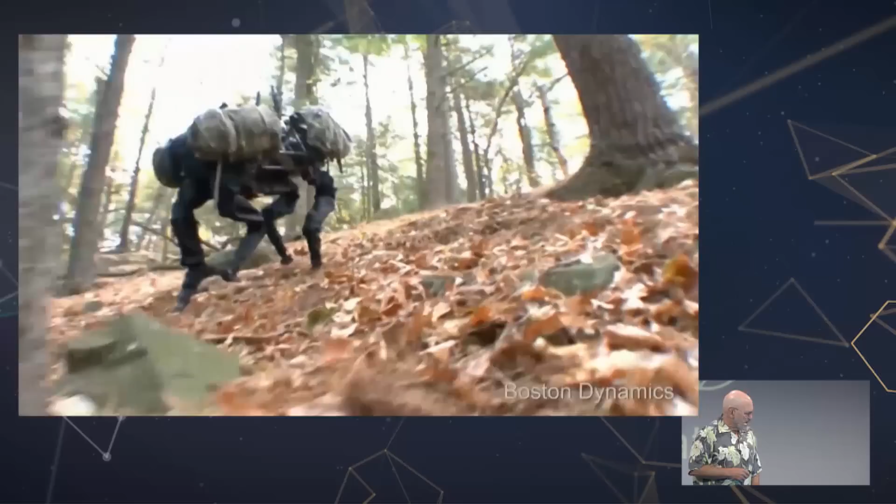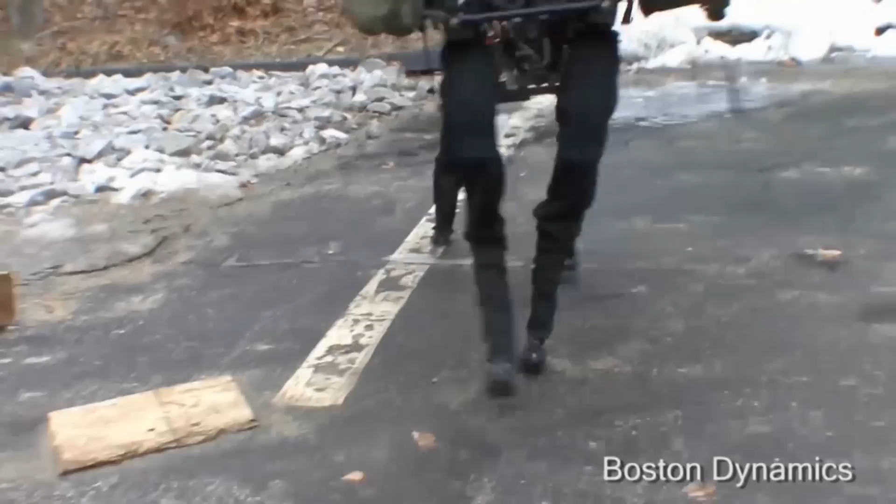So I'm going to give you a status report. This is about 10 years ago. This is Big Dog. This is the first robot that Boston Dynamics made, even though some of us had been making robots before that. And this is a dynamic robot. It's balancing itself. It's got reflexes. It's responding to its motion in the world. That was slipping on ice.

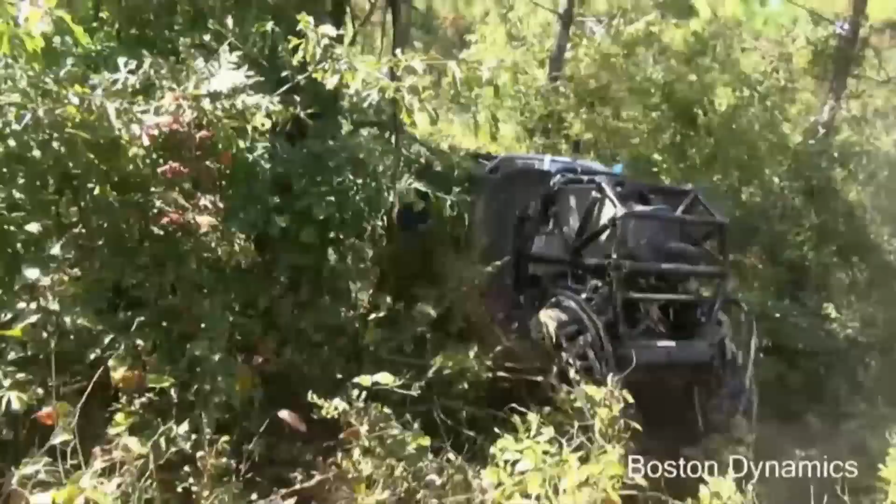And in the ensuing years, using some of the results that we learned in developing Big Dog, we made a bigger version that's designed to carry 400 pounds out in all kinds of terrain. This robot doesn't have a driver. It's following a human leader through the bush and up in the desert. And here we're demonstrating the mobility that legs offer. This is in 10-inch snow in Boston, as you might expect.

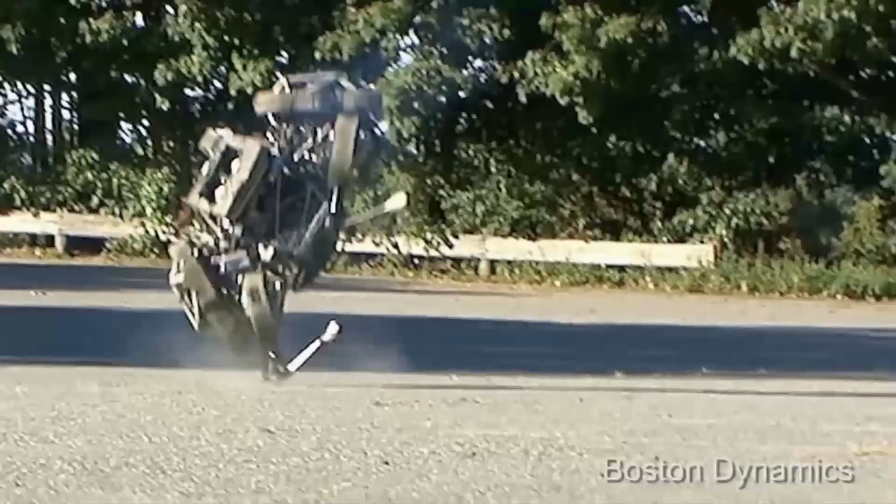And that's one of the fastest-legged robots that's ever been built. It went about 20 miles an hour. We have another version that works indoors at about 30 miles an hour. And of course, there's a lot of dynamics and controls and mechanical design and construction that goes into these machines. So that's where we were a few years ago.

And I'm just going to tell you a little bit about what our approach to this kind of work is. One of the things that I think is a little bit different about what Boston Dynamics is doing is we've been an R&D company for years. And that means we haven't built products. We've built demonstrations, and we've shown videos of the results, but we haven't built robots that we deliver to people. And that's a way to move very quickly, to keep advancing the technology.

But now we are also developing some products. And I'll do a demonstration of a robot that we'll have available next year sometime, which is a shorter range thing. And I think it's a real challenge for our company to be able to do these two things at once, to keep the culture and the intellect and the focus on advancing to the far future of what robots can do, at the same time as we're doing all the practical things of cost reduction, reliability, focusing on what the user needs and adapting the technology for that.

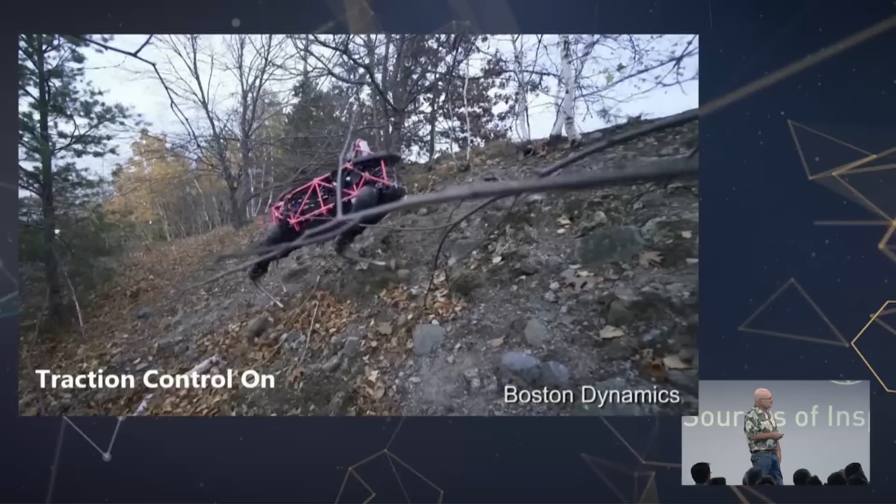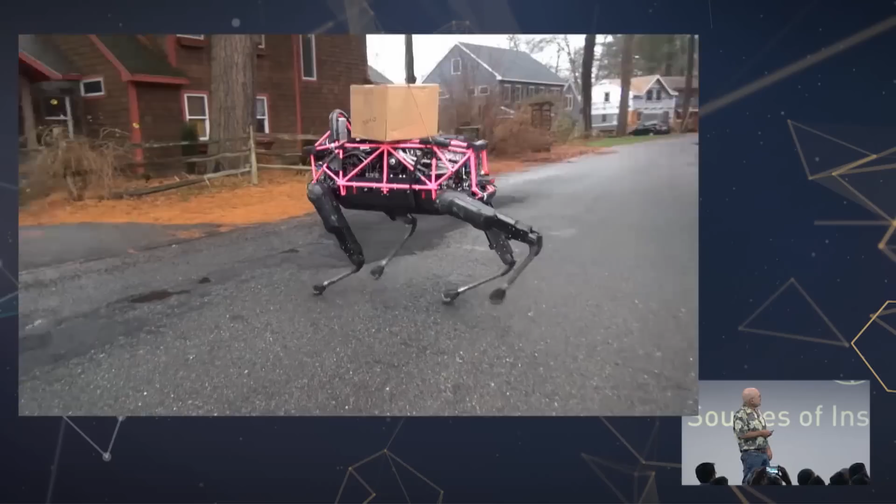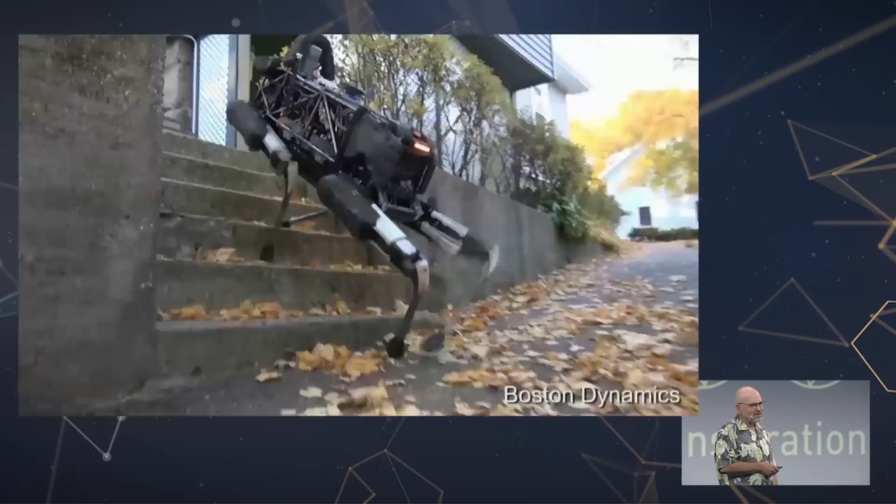So after building Big Dog, the one I showed earlier, we refined all of our techniques and our designs, and we built this robot called Spot. This robot has electric power, but hydraulic actuation. It weighs about 80 kilo. And here we're testing the idea of being able to deliver packages right to your home. Now, this is actually one of our employees' homes, and that's one of our employees' wives. But we've been testing it at many of our employees' homes.

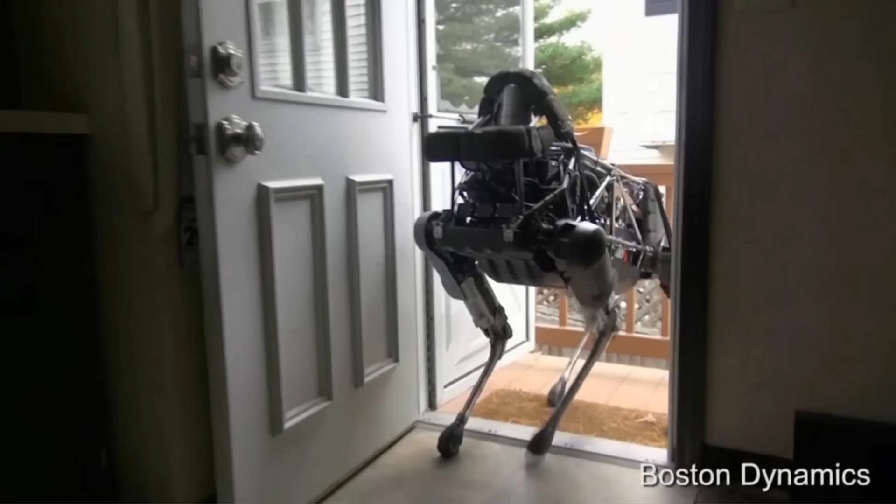You know, in the Boston area, all the houses are different. There's many different kinds of stairways and access constrictions, so it's a real challenge. We've been getting to about 80% of the access places for about 20 of our employees' homes, so that's pretty good.

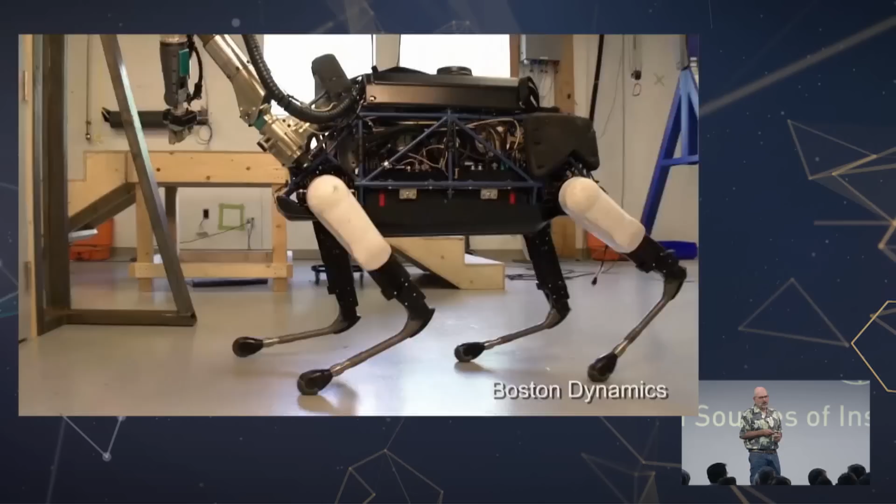Now, one of the things we do when we develop these robots is test them not the way you expect the situation to be, or the robot expects it to be, but in a disturbed way. And testing this way, where we disturb the robot, is one of the most important things we do. I know sometimes people think we're being mean to the robots or abusing them, but we're really not. We're really letting them get better and better at their tasks by understanding what their failures are.

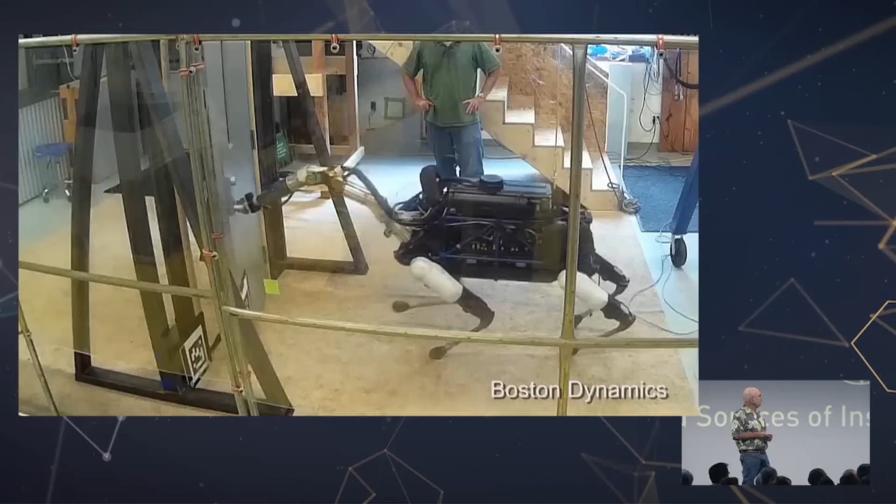Here we've put an arm on a robot, and I'll talk about that a little bit later. And it's supposed to just open this door and go through, but here we're testing its ability when things don't go exactly as it's planned.

I think this idea of testing is going to allow robots to become skilled enough and able enough so that higher level AI won't have to worry about all the details and be able to give them plans and instructions, and we'll be able to have high level AI, which is worrying about thinking and the big problems of the world, something that we really don't do that much of.

And then our kind of AI or robotics, which is focused on how the system moves in the world around it, how it perceives the world, and then how it engages to perform tasks. And those two parts will interact the best when the low level is really capable and able to do what it's asked to do.

So I'm going to say a little bit about how our robots work, just a word or two. I know a lot of people imagine that if you have a dynamic robot, you must have lots of complicated equations and, you know, brainy people who don't come out in the sun and things like that. And we do have those people, and we do have lots of equations.

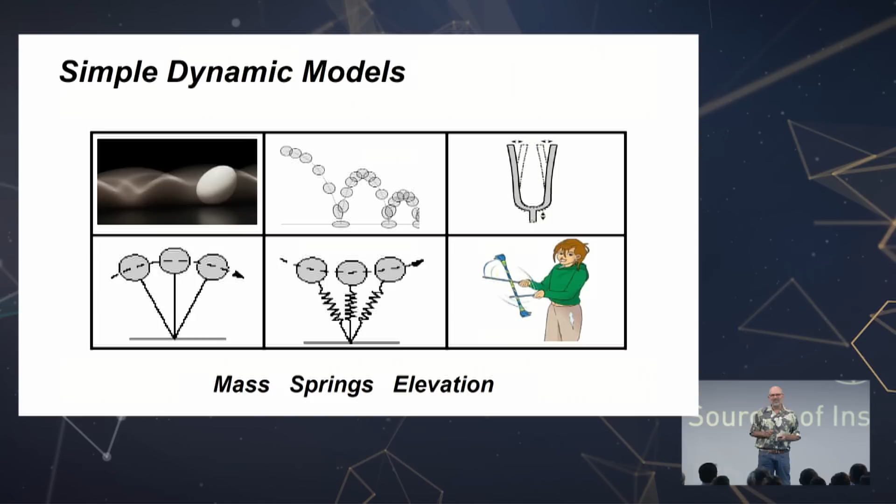But at the heart of things, we also have some very simple ideas that let you understand how robots work in the world. One model is the model of the rolling egg, developed by some biologist maybe 50 years ago. And the idea is that when an egg rolls, its energy goes up and down as the center of the egg goes up and down.

Its energy also oscillates out of phase with that as its speed changes, because when it goes up, it goes slow, and when it goes down, it goes fast. And that's very much the way a person walks when their body goes up over their legs and their speed changes. So this is an interesting model, a very simple one, of how a person walking is.

This is a bouncing ball. And when a person or an animal runs, they're really a lot like a bouncing ball. They have elastic things in their legs that they store energy in. They fly through the air, where they also have kinetic energy and potential energy of elevation.

And the point is to think about the mechanical system, the energies that are stored in it, and coming up with a model for how all those pieces can interact to get the behavior you want, like walking and running and manipulation and other things. And there's other models here which, if you're interested, we could talk about out in the lobby.

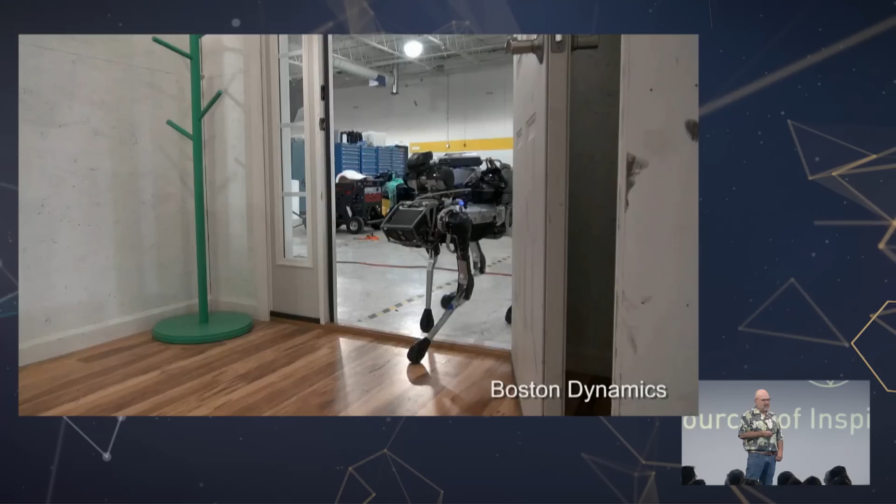Next, let me tell you about Spot Mini. This is the robot that we have in pre-production right now and will have available as a product, mostly to businesses next year. I don't know how long it'll be till this will be something that individuals can buy or even afford, but we are cost-reducing it, making it more reliable, and the like. So Spot Mini, as its name implies, is smaller than Spot. It's all electric, which means it's very neat to have in your office or your warehouse.

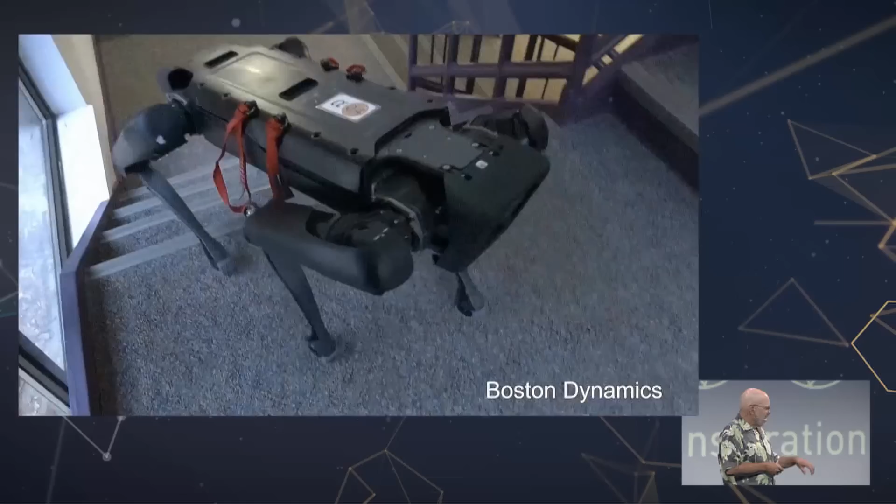And this is not a real house. This is a mock-up of a house. Those aren't real people. Those are engineers. And this is just a place that we built in a warehouse where we can test the robot in its ability to go up and down stairs. The robot has sensors on it, so it's perceiving its environment and adjusting its behavior to accommodate it. So no one's driving the robot here. It's actually an autonomous run where it's sensing the stairway and going along a path.

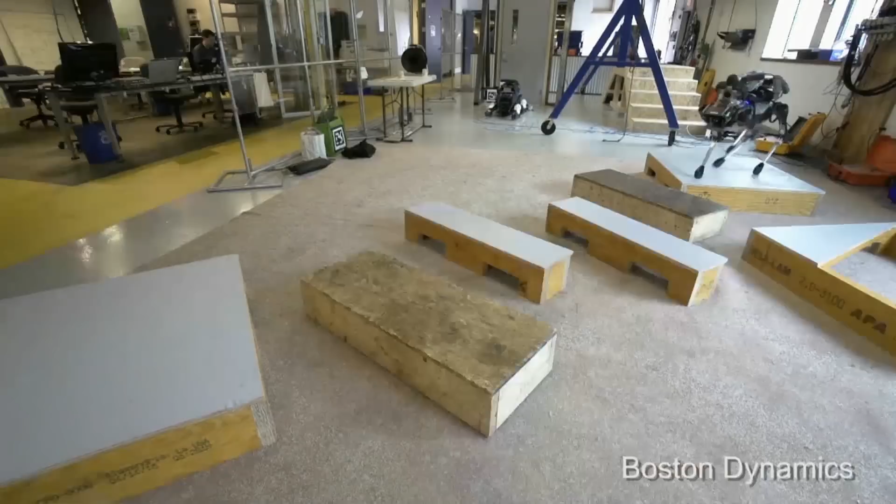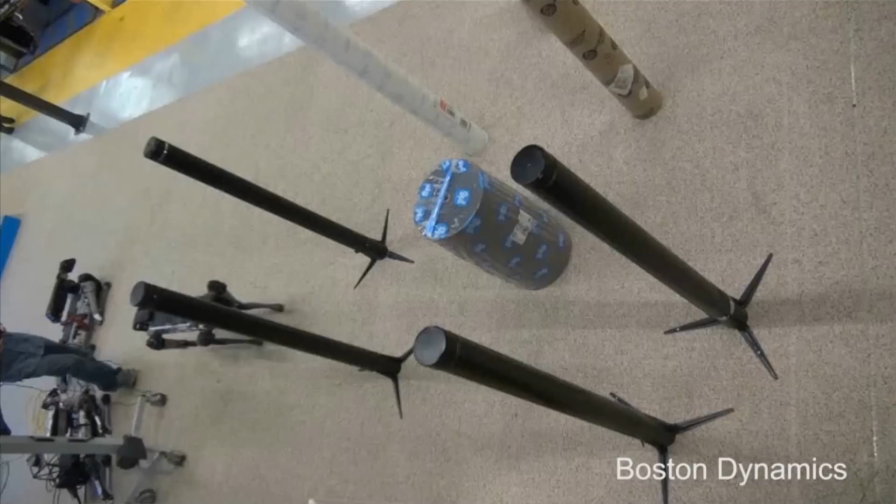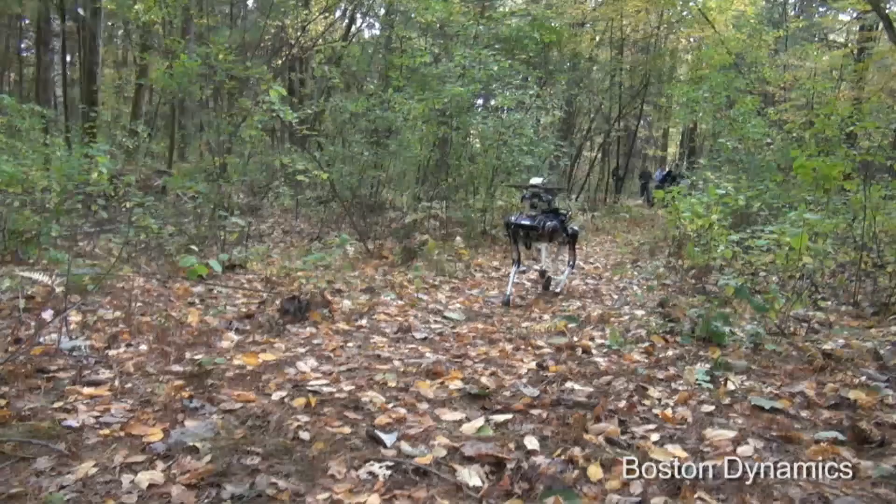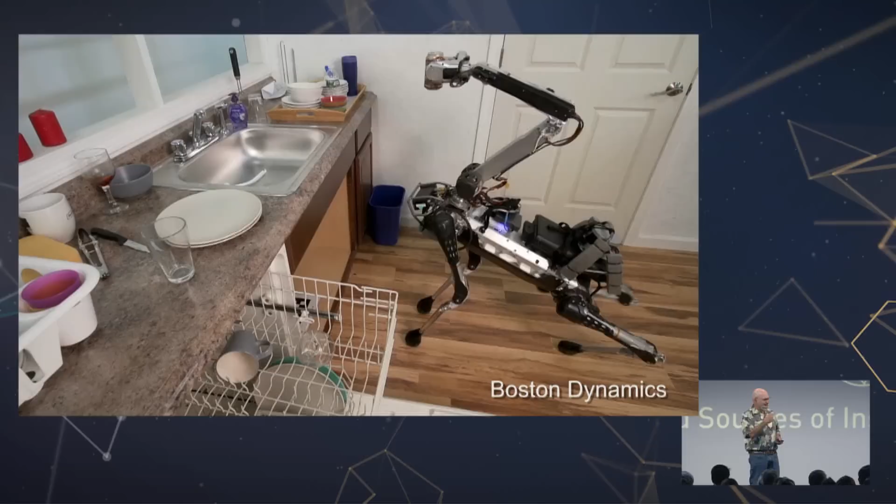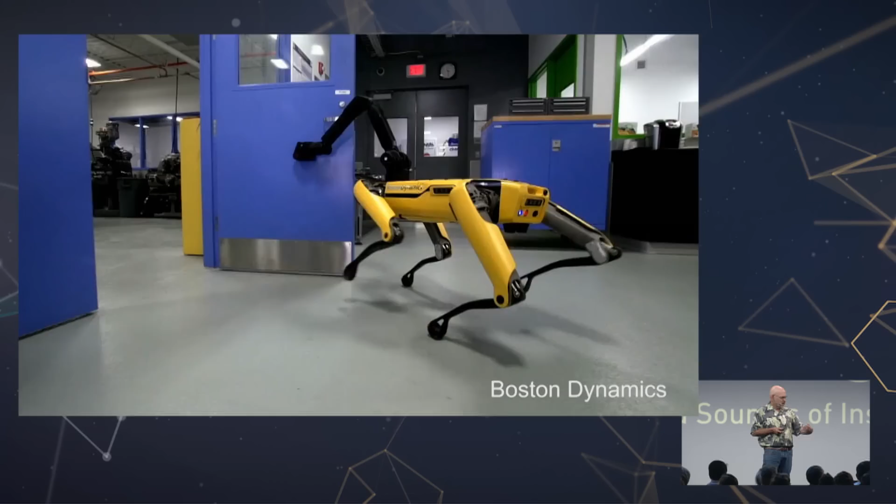So here Spot Mini is opening this door, doing a complicated task. It's not strong enough to just pull the door open and go through, so it uses its foot to hold it. It's actually being courteous to this other robot, which doesn't have its own arm. So it's sort of a disabled robot, the other one.

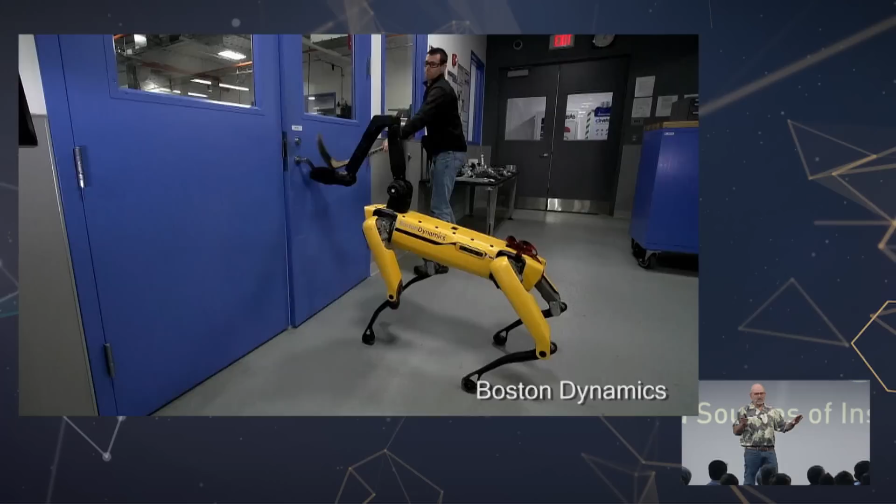And here, once again, we are not being mean to Spot Mini. It is not upset or irritated, as some of you may think. And that guy is a very nice guy, Andy. He's really helping the robot by challenging it to perform its task in unexpected environments, no matter what happens. And it does go through the door, as I think you know.

Now, we've designed Spot Mini to be a platform, which means that we're building basic functionality into the robot itself. It has sensors and computers and obviously its mechanism and a capability to move with great mobility through the world. But we're also providing features so that users can add their own hardware and their own software.

And so we're calling this the Android of robots, because just like you can buy an Android phone and then write your own app that goes on top to specialize it for your particular function, we made Spot Mini so that users can put equipment, hardware, and software in order to specialize it for their own application.

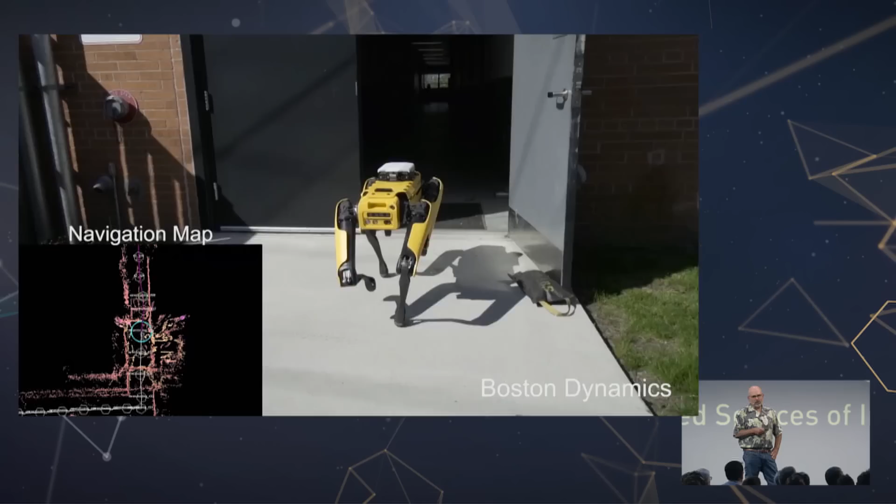This is partly motivated by us not yet knowing what the killer app for robots is. We have a pretty good idea of some things they'll be useful for, but we're in that period when we need to advance the state of the systems and make them cheap enough and available enough so that others can experiment with them, and I'm sure people will come up with things we never thought of and develop them for that. So we made some progress with developing apps, and these are two apps that we've developed ourselves, so we haven't gone the step of having third parties.

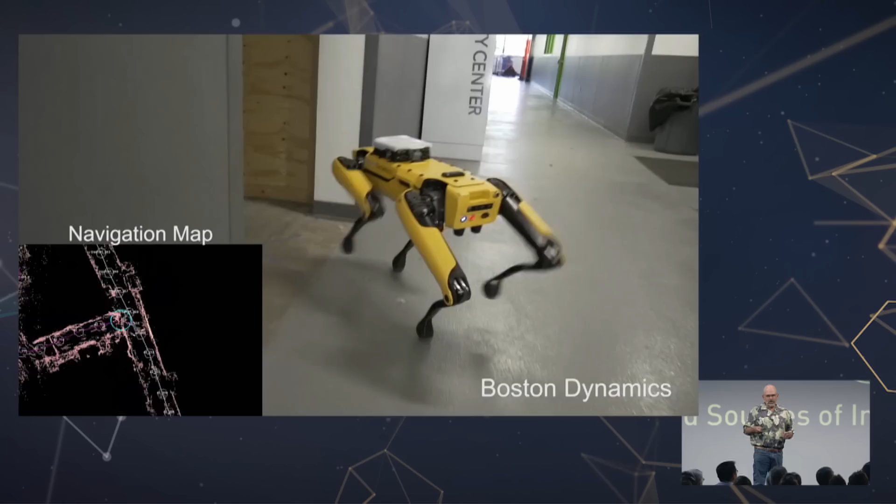This is a navigation or patrol route map app where there's a computer added on here that has a map of the world, which we achieved by just driving the robot through the world with a human driving it. And now the robot is going autonomously through this space, and it just goes over and over through where we told it to go, using the data collected from its onboard cameras to help it navigate.

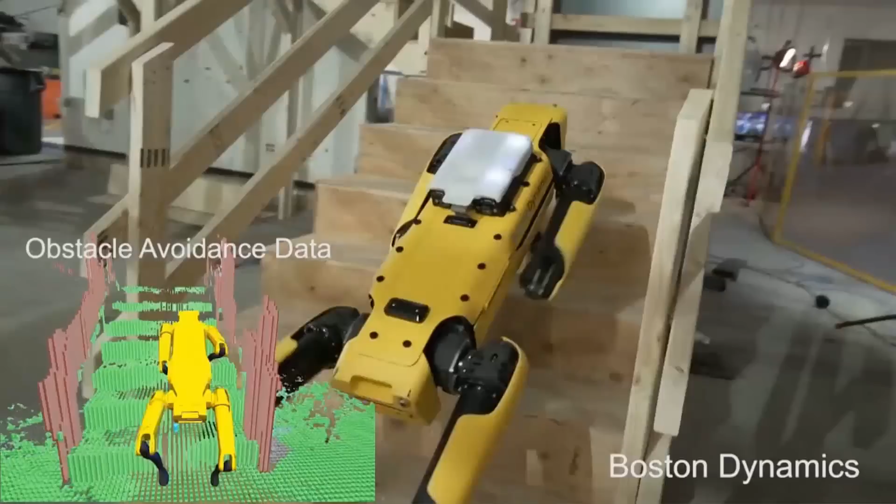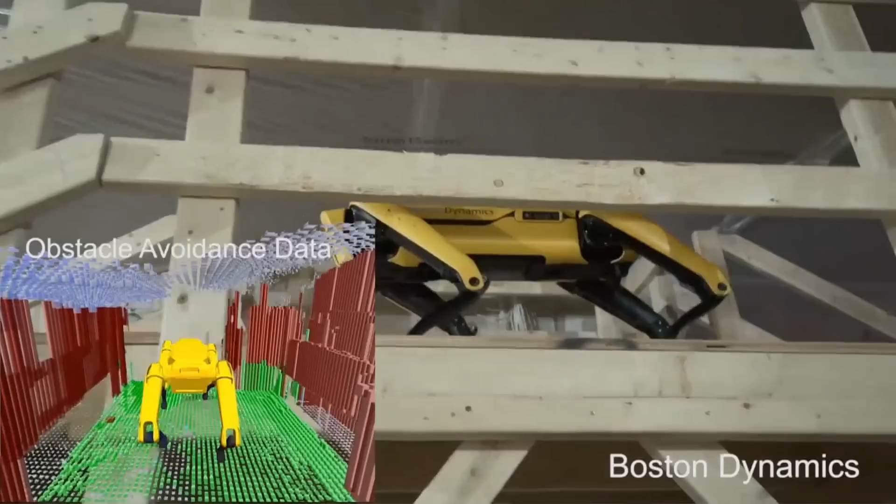You can see the view from the onboard cameras in terms of the obstacles it sees, and that lets it see the stairway, decide where to put the feet as it climbs the stairs. The whole time it's balancing itself, it's picking footholds, it's doing some rapid computations, looking out in the future in time so that it doesn't bump into things. There's a lot of coordination that goes on. You can all do this, but you don't even think about it when you're doing it.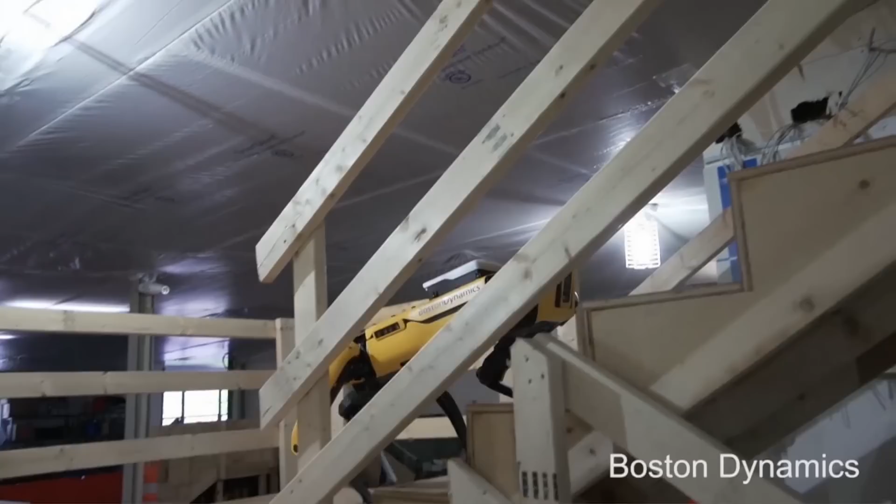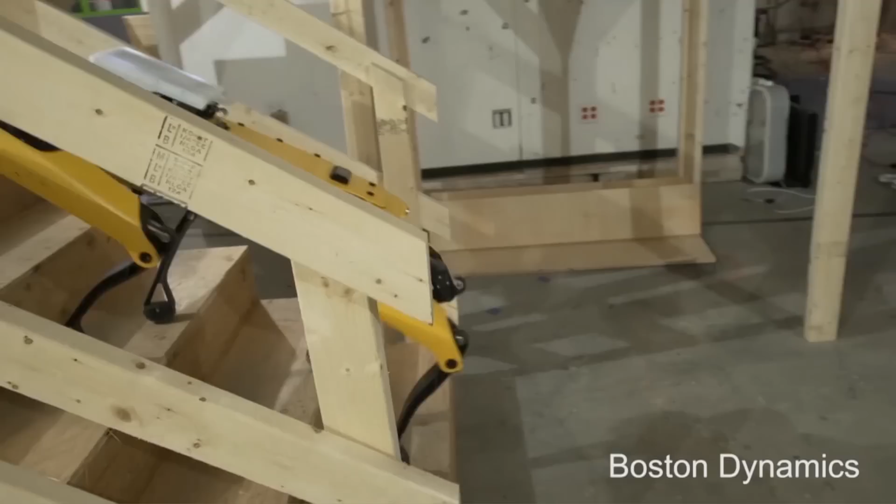But one of the cool things about robots is we have to address each of these problems ourselves and design the robot to do it. Now, you notice the robot's going down the stairs backwards. It turns out that a quadruped with this limited leg design has an easier time going down the stairs backwards than forwards. And there's even some dogs that have that restriction too.

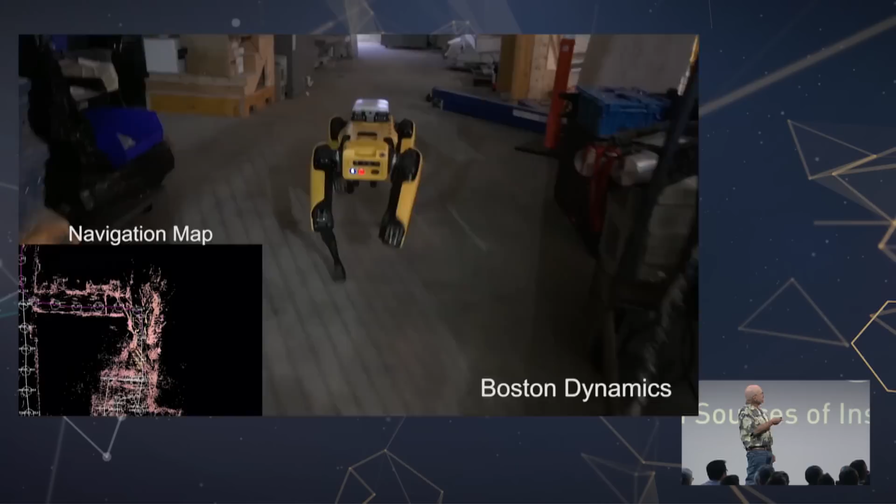And then here again is the map that it's using for navigating. Again, the same kind of data that's used for obstacle detection, but here it's navigating. And that video is on YouTube if you want to see it.

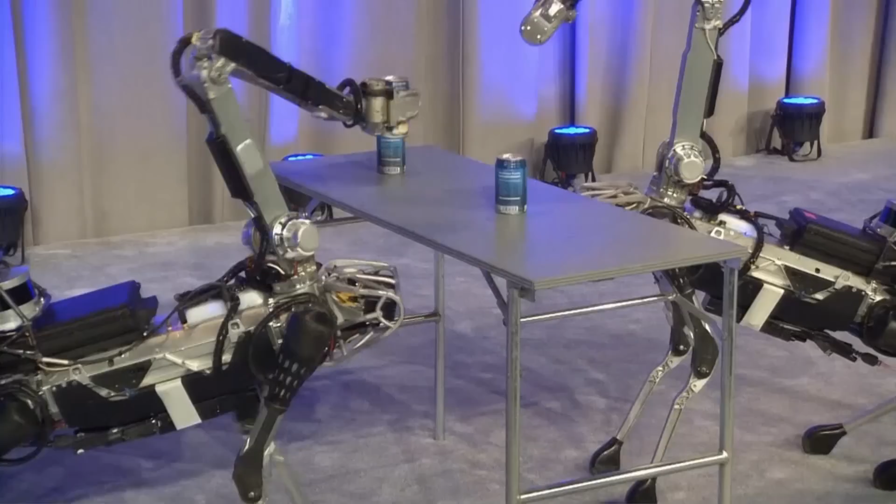Here's another app where we have an outside computer that's coordinating the behavior of these multiple Spot Minis to do a manipulation task. So it's telling it to find the can. It's got a camera in the hand. And then here we have four Spots all working together. They don't actually know about each other. The computer that's coordinating them is passing data back and forth, but they're each doing what they're told, which is to handle these things.

So we have a Spot Mini here, and this is Seth Davis, the head of our field ops team.

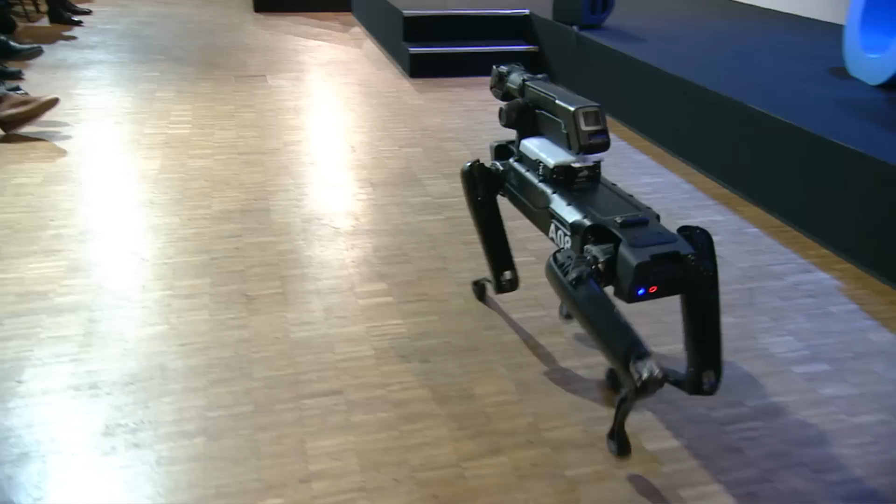And he's going to bring Spot Mini out. We're going to bring it up on stage, but first we'll bring it over so you can get a better look. Some of you will get a better look. If you can't see it, they have a camera feed here.

So this robot has onboard computers that are controlling all the coordination, the sensing. You see it go up the steps. It can see the step and adjust its footfalls in order to accommodate that. We'll do that again when we come up on stage. And Seth is giving some high-level instructions. There's a radio connection. Seth's standing here in the front. And he's giving high-level commands like go forward, turn left, and steering it. And he's got some buttons that he can press that changes the mode of operation.

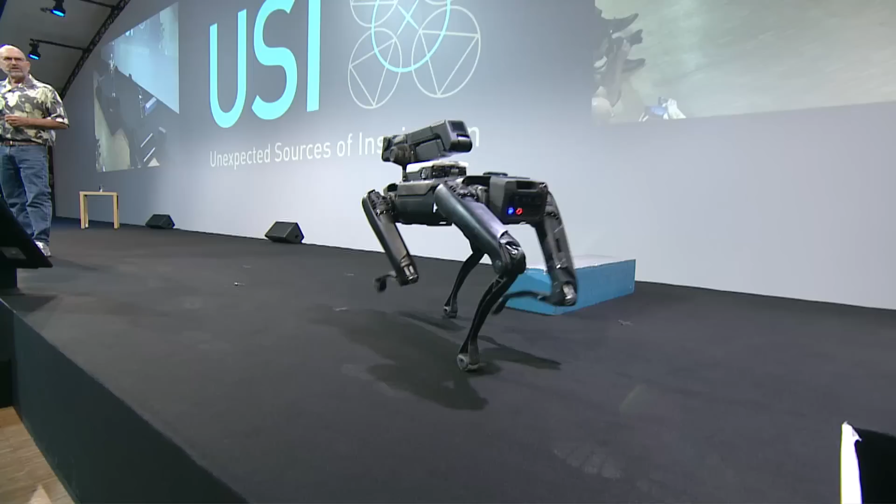So even though in today's demo, I would call this semi-autonomous, in that the robot is handling all its local processing, Seth is giving the high-level guidance. But we have other modes where the robot can go on its own. I'm supposed to get out of the way.

So this robot can walk with a variety of gaits. Here it's walking one leg at a time. Now it's trotting, which is diagonal legs in pairs. It can also pace. If you know animals, these are all gaits named for what animals do, and we're sort of copying them. Here it's using the legs on the left and the legs on the right together. And all the coordination for that is done by the robot using that sequential composition I was talking about earlier.

This robot's omnidirectional. It not only goes forward, but it can go sideways, and it can turn in place. And it can also move while it's turning in place. And it can pose its body. And the posing of the body is really important because think if you had a robot arm that was fixed, its base was fixed in space. And almost all industrial robot arms are bolted down to a table.

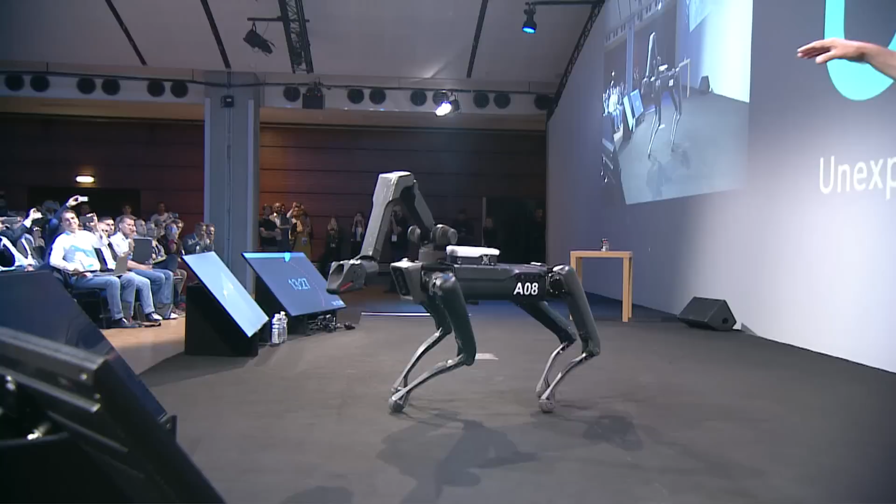Well, try this experiment with your own arm. How far can your hand reach? Try it at the dinner table tonight, and you'll be amazed that your arms are almost no good if you can't move your shoulder. But as soon as you can move your shoulder or even take steps, your arm has tremendous reach. And so we believe that mobile manipulation, where you have an arm on a movable body, is really a break in the paradigm and a way to make robots much more useful than they are otherwise.

You know, we really like the thing in the movie that the chickens can do and that people can do, where we can hold our hands still while our body moves all around. And it represents a level of coordination and decoupling that really represents what people and animals are great at. And that is to think about the task you're doing and not worry about the details of what your muscles and your body has to do. And that's what Spot Mini's doing here.

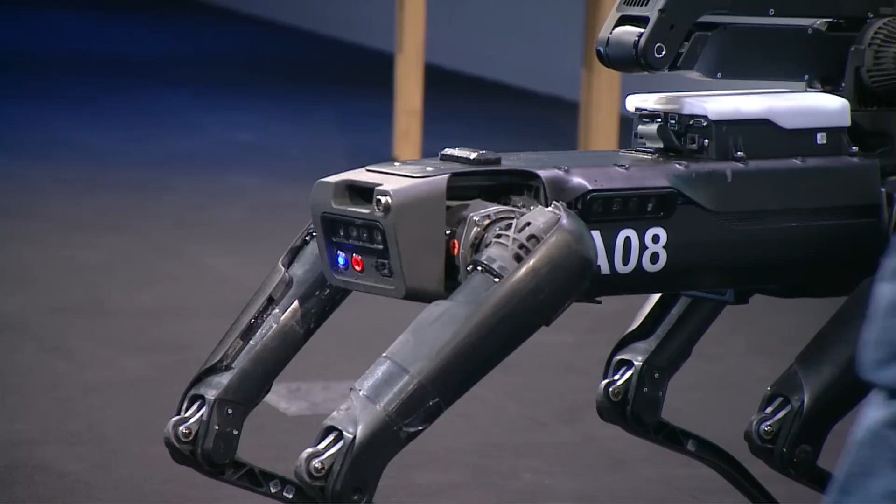Now, this robot has a bunch of cameras on it. It has 2 on the front, which are stereo cameras. It has, when do you turn around? It has 1 on the side. Keep going. It has a butt cam. I don't know how that translates into French, but it's got a camera on the back. And it's got 1 on the other side. And can you open up the hand? And it's also got a camera in the hand, which we'll demonstrate in a couple of minutes.

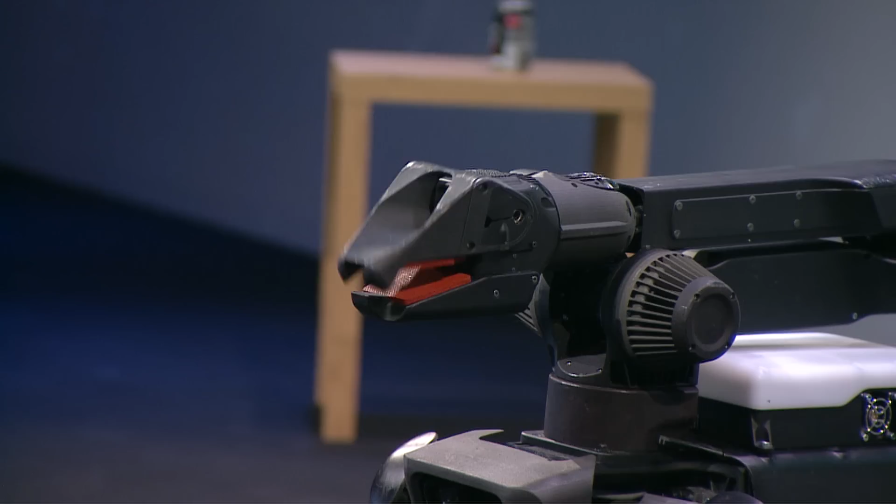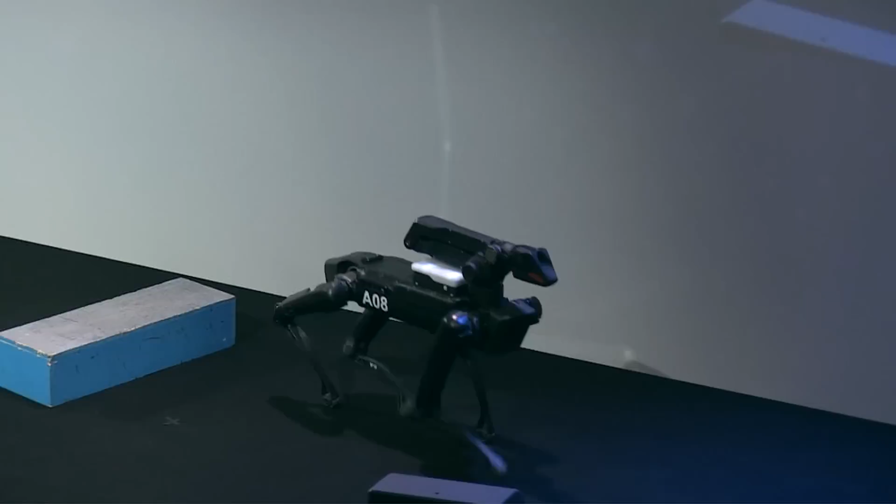So using these cameras, the robot can negotiate obstacles like the stairs. We brought 1 step up here so you can see that. And the robot sees the step as it approaches, changes the pitch of the body, adjusts the stepping of the feet. It's a little bit small here because there's a gap in the back here.

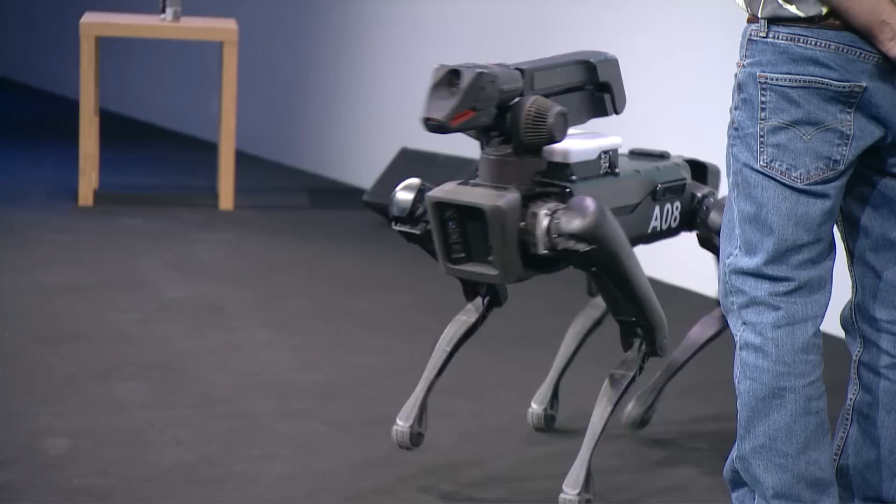Another cool thing the robot can do is, Seth, drive the robot right into me. He's going to put it into don't drive into him mode, so all he's doing is telling it to go forward. And when the robot detects me, it steps around. And he's going to do it sideways too. Go ahead. So he's telling it to go sideways, but it won't go because it sees that there's an obstacle in the way, which is me. I won't quite say that it's safe and it's never going to run into anybody.

We were at a trade show 2 weeks ago, and some guy blocked it and went like this, and the robot tried to go between his legs, and eventually we got it to go through, but anyway.

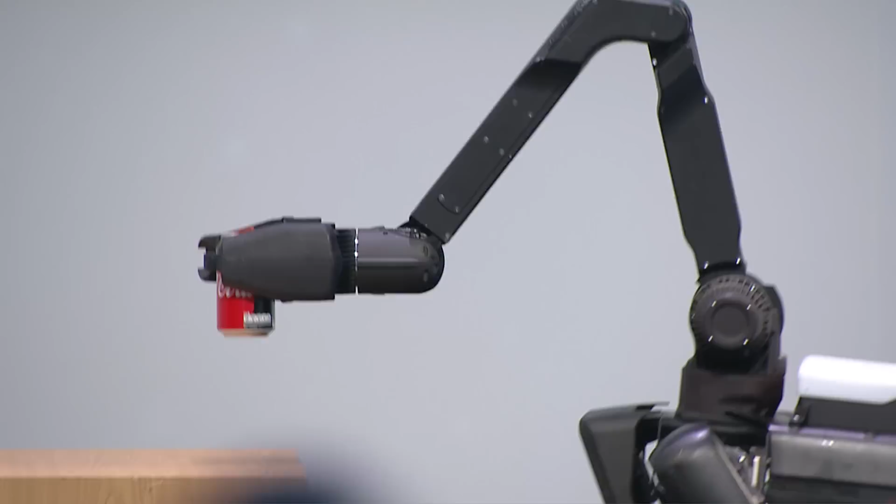You know, I'm feeling a little bit thirsty. Could you get me something to drink, Spot? It's not listening to my command. Seth is listening. But Seth is driving it over. But now it's in autonomous mode where it's using that camera in the hand to search for something to pick up. It found the can, and now Seth's driving it again. We have automated this whole thing, but it's a little hard to do on stage. Well, thank you, Spot.

Now, Spot's a little bit of a show-off, so it's going to show you that it can do some even more dynamic behavior. It can run.

And if that's not enough, it can run on 2 legs. Thank you, Spot. That's enough. Thank you, Spot. Thank you, Seth. So he's going to go down the steps frontward. Let's see if that works.

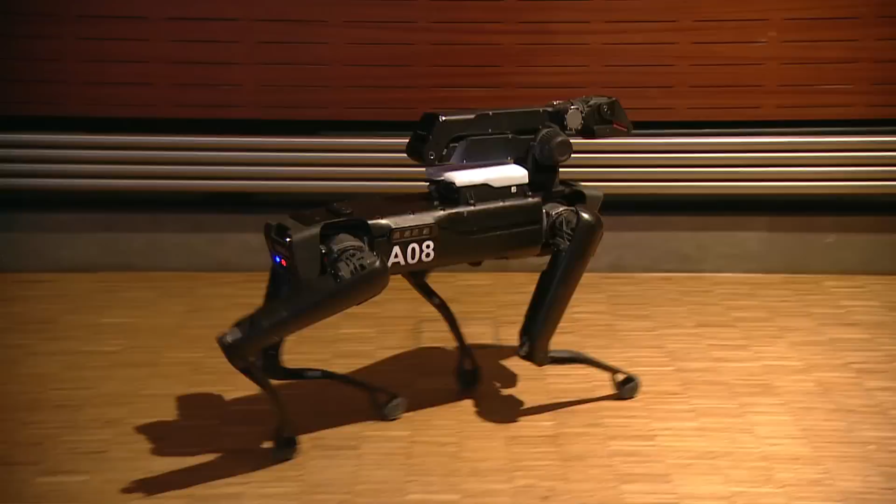Very good. Spot will be available during the break an hour from now out in the lobby. So if you want to see it up closer, or we'll give you driving lessons and you can drive it yourself. You'll see that it's very automated, and even though there's a driver, the driver's just giving instructions. Could I have the slides back?

So I'm going to say a few words about 2 other robots. One is a humanoid robot we're building, and this definitely is squarely in that region of the future. We don't have ideas for immediate applications aside from entertainment for this robot, but we believe some of the work we're doing on it is really paving the way for more advanced, complicated interactions, whole body manipulation, and things like that. But before I talk about that, I wanted to say something about our philosophy of robotics.

A lot of people think that robotics is you have a robot and you have a computer, and the robot sends sensory information to the computer, and the computer sends instructions to the robot, and you have some software doing that, and that's the whole story. But this is really only half the story. The other half is that the robot is interacting, especially a dynamic robot, with the physical world.

And the physical world means that there's gravity pulling on the robot, which is a kind of instruction or command. There's friction, there's compliance, which means springiness, either in the world or in the robot. Almost all mechanical systems have some, and actuated systems have some compliance in them. And that means that there's energy, kinetic energy and potential energy, stored in the robot, and that acts like a command to the robot in addition to the commands that the software is doing. So we believe that you need to design this whole system that involves software and hardware design and try and come up with a harmony between how they all work.

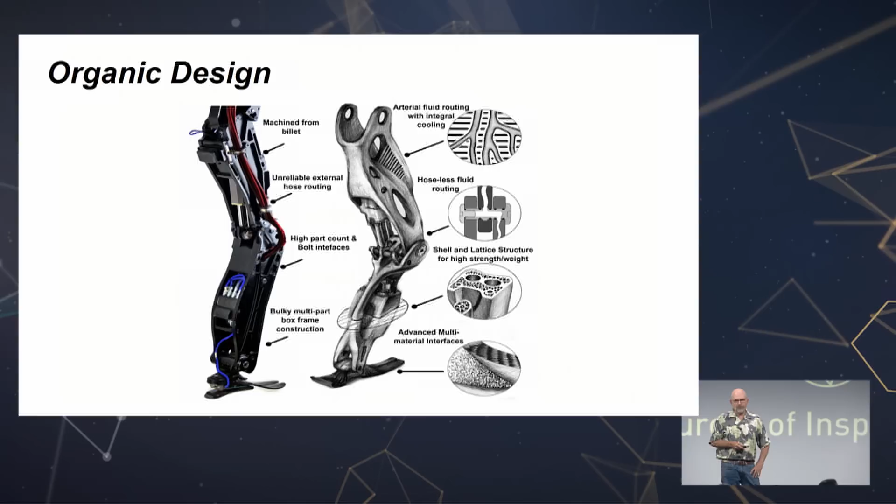And this is a concept that's supposed to look like an anatomy diagram from a biology book, where everything is more integrated and smooth. There's tissues here that have places for fluids to flow or signals to go. And that's the concept for the future. And I'll show you that we're making some progress towards this future using 3D titanium and aluminum printing, which is becoming very popular nowadays. So this is a leg part.

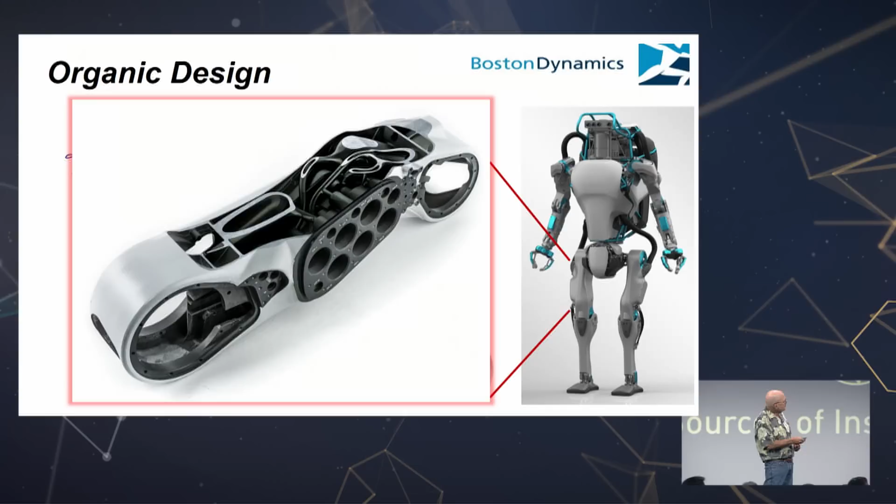It's right here in this humanoid. And it's got oil paths. This is a cutaway, so it doesn't actually look like this, but it's got oil paths. It's got a place for an actuator here. These are places for valves. And it means we were able to take a very big, heavy item and shrink it down. It's also got some empty spaces, and shrink it down to make the robot lighter and stronger than it was just doing it the old-fashioned way with fewer connectors. And we've done that to many of the components in Atlas, our humanoid robot.

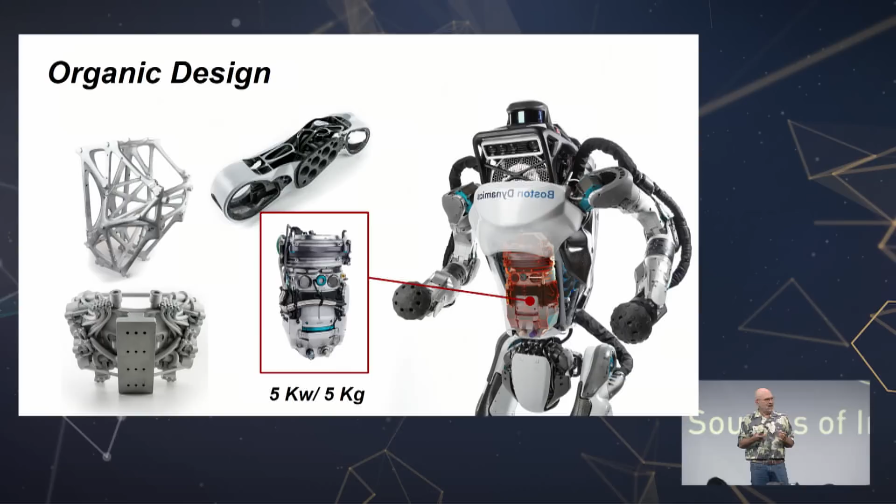The space frame is printed, which means it can be a lighter structure. This is a hydraulic manifold. We should really show it from the other side. It's just a beautiful piece of machinery that's got oil paths and places for valves and filters. That's about a third the weight of what the previous piece is, made of separate components. And this is the ultimate version of the use of this. This is a hydraulic power supply that has a motor, a pump, an accumulator, a reservoir, filters, valves, and all the communication paths.

And it let us get a system that was about 4 times the volume and 3 times the weight down into a very small package so that our robot could be lighter and thereby relatively stronger than it was before. So using these techniques, we started with a robot. I'm sorry, I have this in English units, but this robot weighed about 375 pounds. That must be about 170 kilo.

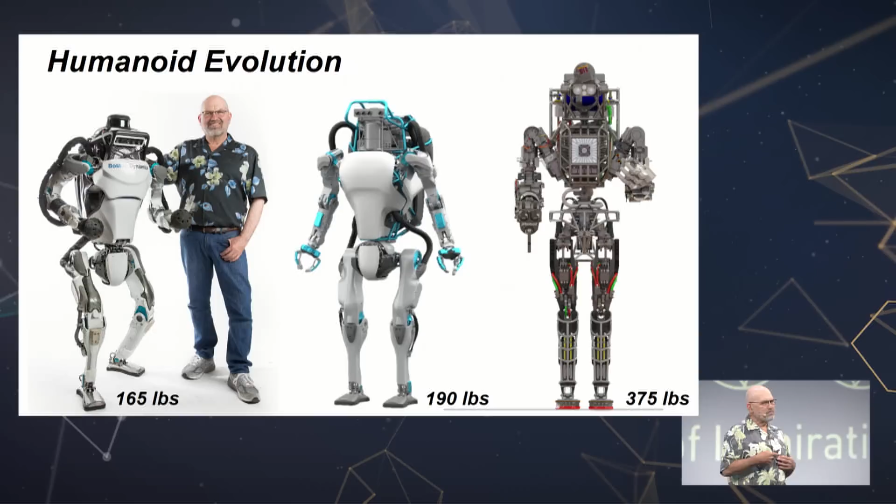We were able to, in a first step, shrink it down to about 80 kilo, and now we're down to 165 pounds, which is just a little bit lighter than me. We both have a goal of getting down to 165 pounds. I'm not quite there yet, but the robot is down there. So I'll show you a little bit of Atlas in action.

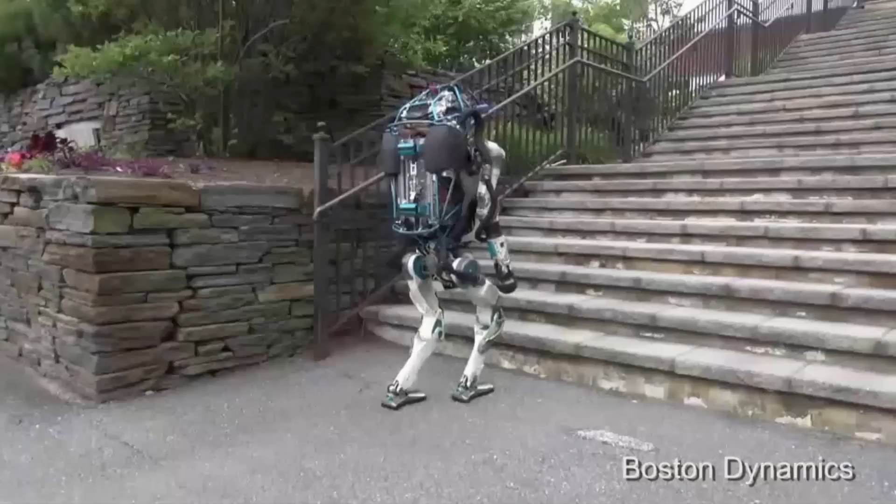This robot also has some sensors. It has a LiDAR and a stereo sensor that's used to detect these stairways, adjust its feet as it goes. And this is an outing. Again, it's very important to take these robots out in the world and test them, and that's what we do in order to develop their skills and capabilities.

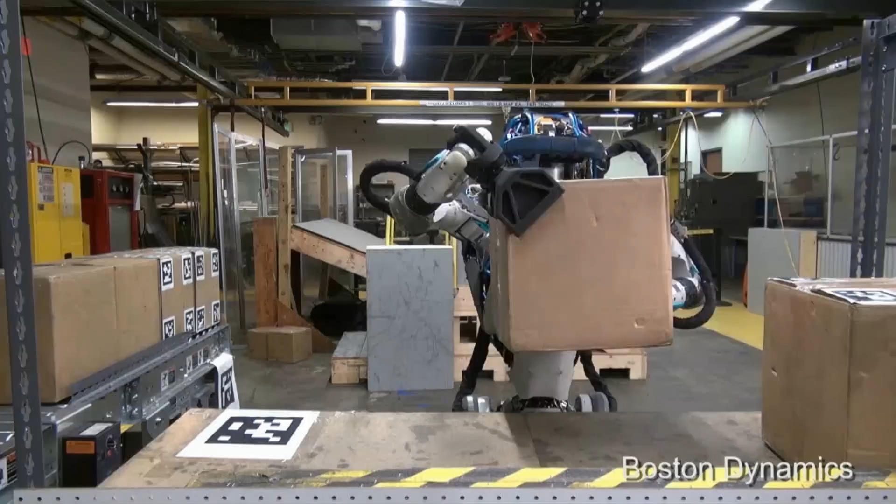Here we're experimenting with whole body manipulation, not just the arms, but the torso is contributing to the motion, and the legs are also contributing to the motion. The vision system is locating the boxes. Here we're using markers on the boxes to simplify the vision. And here we're seeing if we can make the robot perform this at about human speed.

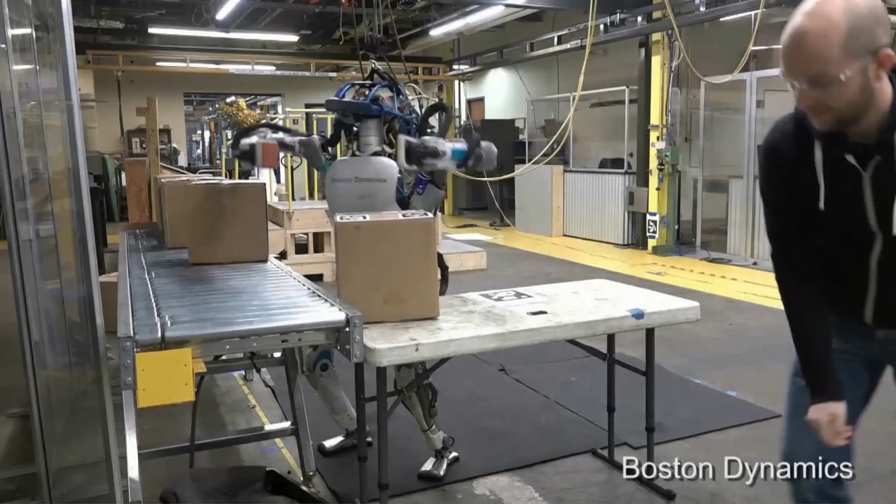And of course, if it can do it with a human, why not do it with another humanoid robot? I don't know why everybody finds that so funny. It is funny, but I don't know why.

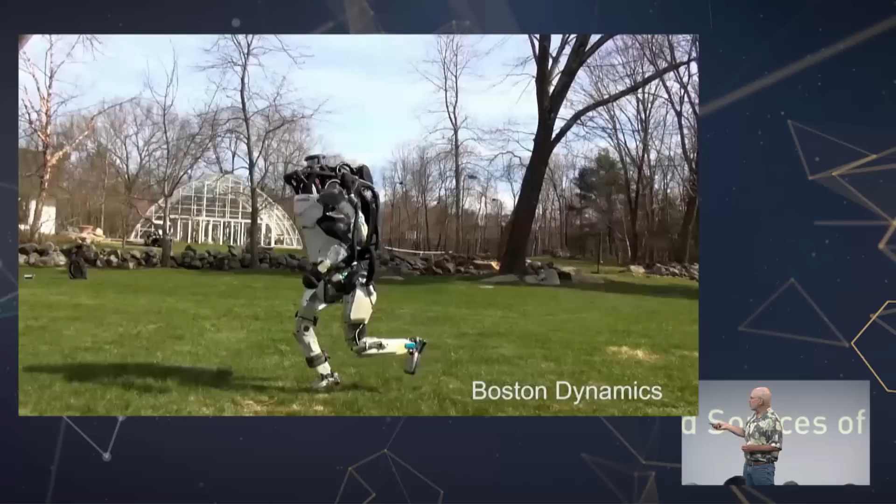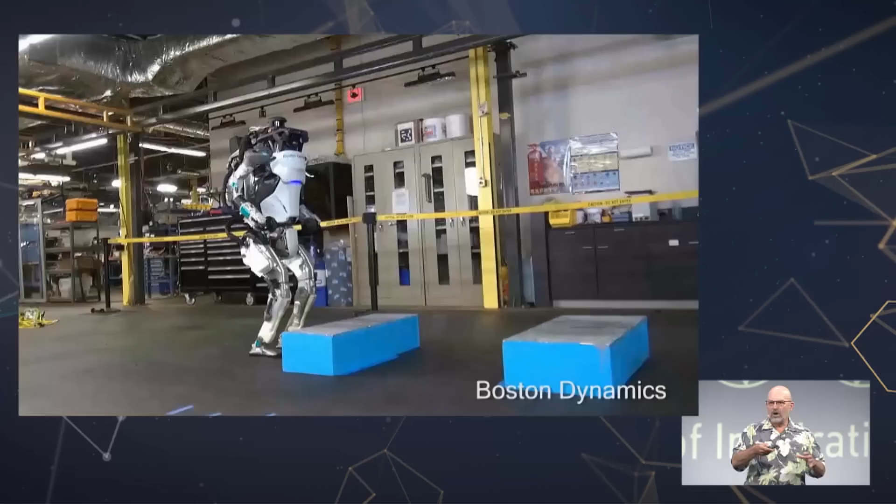Thank you. Here we've been working on dynamic locomotion, running out in terrain, so it has to sense the terrain and adjust to it as it runs. The running isn't perfect yet, but it's getting better and better. And we're working on the kind of running you might do when you play soccer. And here's some dynamic tasks that the robot does by coordinating its dynamics.

Here's a pretty tall jump. I'll bet that that's taller than half of you can jump. I certainly can't.

I just have one more thing I'm going to show. You know, the name of this conference is USI, which is sources of inspiration from unexpected places, or USI, I guess. Inspiration from unexpected places is one of the taglines. And one of the places we get inspiration is from biology. And it's important to know that we're not trying to copy biology, because we can't. You know, we have to use real engineering that's available to us.

So we can take inspiration from the dynamics and balance that animals use, the compliant structures, and use that as an asset and not a liability. Whole body control, these are all things I've been talking about. On the other hand, we can't really deal with the complexity of animals, which are immensely complex compared to our robots. Right now, there's no way to use the metabolic power that animals use, and we can't fabricate the way animals do. So we are inspired by biology, but we don't really try and copy it in many cases.

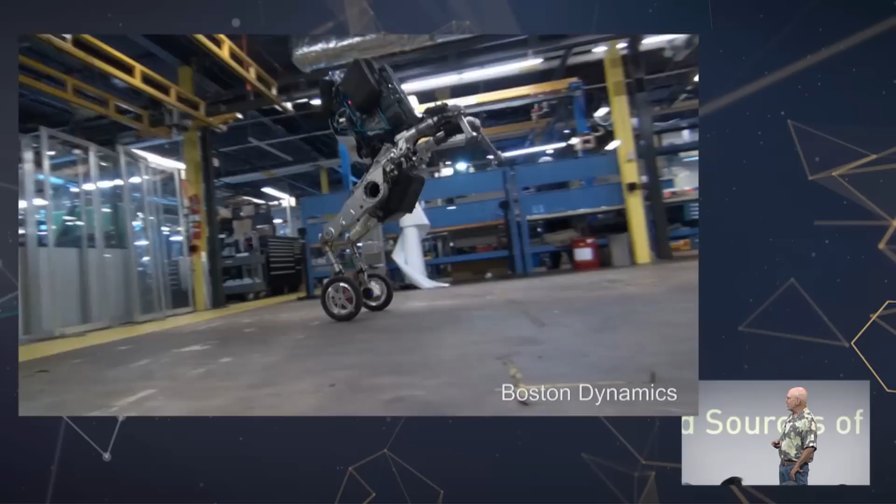But I have an example where we've been inspired by biology, but we haven't tried to make the robot look like an animal. So this is a dynamic robot that has compliances in it. It's balancing, but it sure doesn't look like any person or animal that I know. It's got wheels and legs. It's not really a Segway design because the legs are independently actuated and it can lean.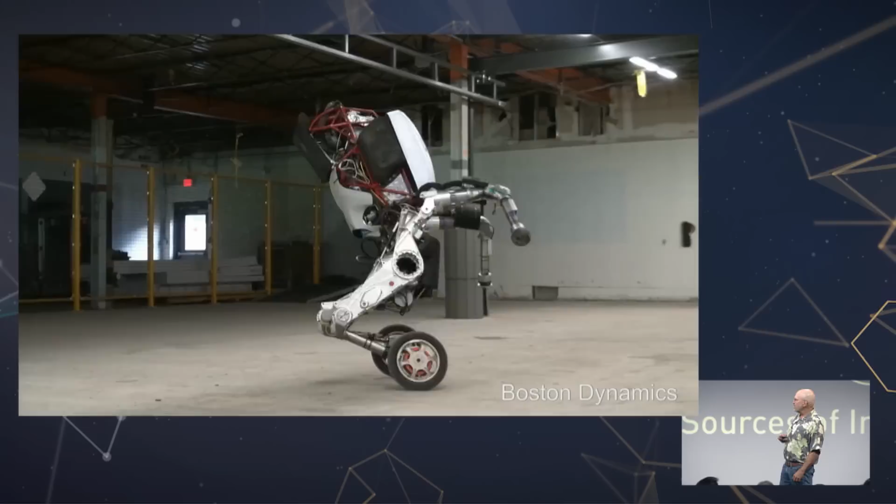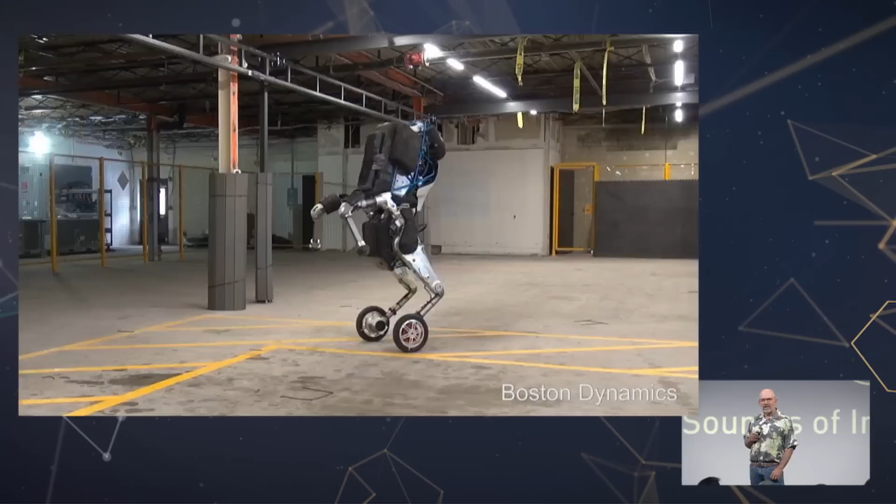This is the first version of this robot. We're working on a second one that is a refinement and has some really interesting applications that are still secret, but I'll tell you about maybe a year from now. And we're excited by that. You can see it's not a Segway. It's got independently suspended legs.

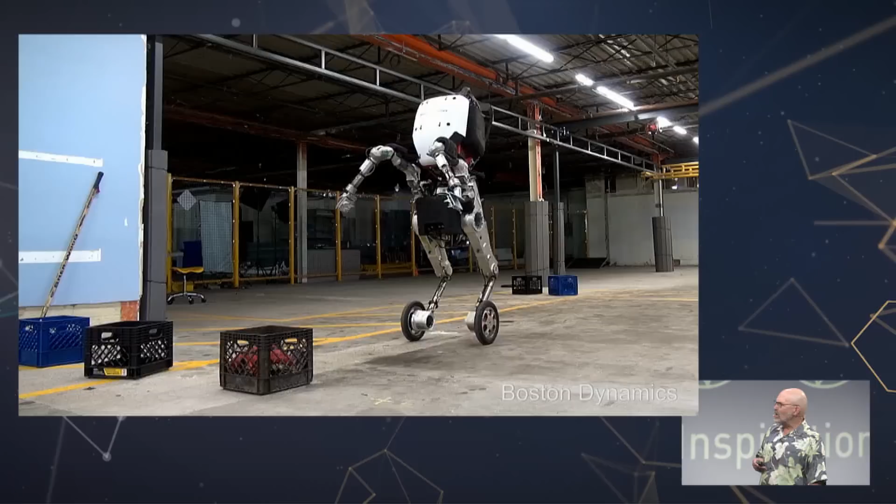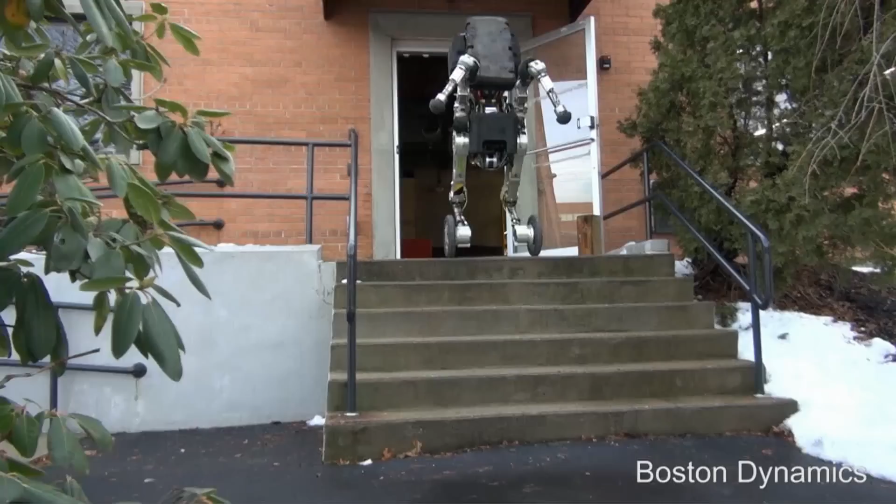It can carry a heavy load. This is about, as you can see, about 50 kilo. And of course, it's a dynamic robot.